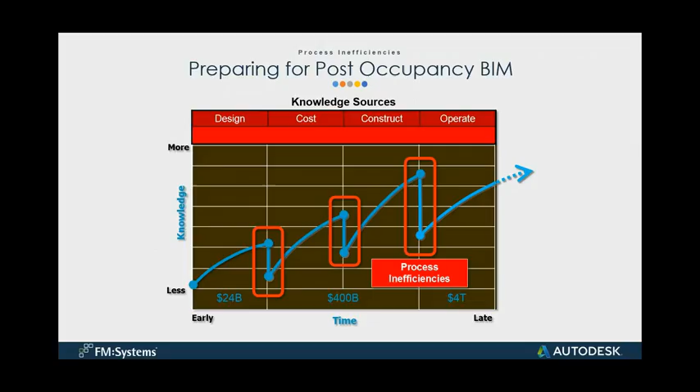So if you think about this from the perspective of design-build, design-assist, CM at risk—all of these contract models create processes with handover points. And it's those handover points where very natural inefficiencies crop up. If we have to move information from one stakeholder to the next via some form of lowest common denominator, invariably there are going to be information dropouts. These process inefficiencies are where the opportunity exists for building information modeling. And here's the reason why—this is, in one slide, why I say this is about process and not about technology: if we can understand and identify these process inefficiencies at the handover points, we can use building information modeling as a catalyst to process change.

It can become a platform upon which we can hopefully bridge some of these major handover points and create a much more efficient and smooth workflow.

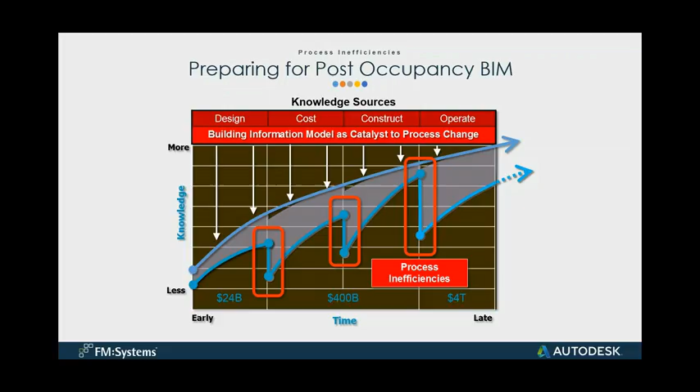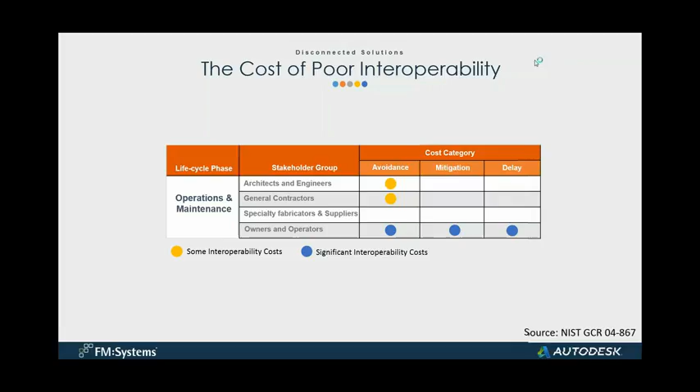It's really important to understand what these process inefficiencies cost and exactly how they affect everybody involved in the process. The National Institute of Standards and Technology, or NIST, did research which showed that the cost of that interoperability had a dollar value associated with it, and that owners really paid the most significant interoperability costs. They broke that down into a number of cost categories: avoidance, mitigation, and delay.

But what it really comes down to is the inefficiency inherent in the business process: redundant facilities management systems costs, meaning duplicate data entry into multiple systems; operations and maintenance staff productivity loss from rework, re-entering information, lost data, going back into construction process paper documentation; and simply idled employee costs, which assumes employees are waiting for information that's not readily available at their fingertips.

They actually estimated this to be 23 cents per square foot per year. So for a 100,000 square foot building, that's going to cost you $23,000 in simply interoperability costs related to technology.

We actually think it's a lot worse than 23 cents a square foot when you start to look at all of the processes, all of the technology involved in managing a large portfolio of buildings. Think about a facility manager's problem managing a large portfolio—multiple locations, different countries, regions, campuses—really multiplying that interoperability problem.

We've also got technology. They could be using AutoCAD to manage their floor plans, and they may be adopting a BIM-based process. They may be using different browsers across their locations, different databases, multiple different mobile platforms, et cetera.

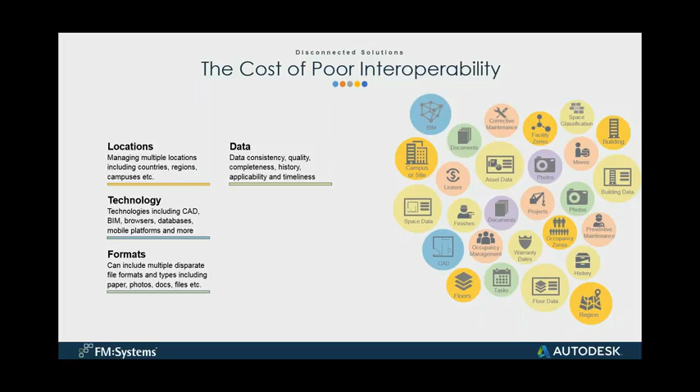Then there's the data consistency and quality. If you don't have standards, if information coming in off your construction or renovation and retrofit projects, or different locations, are all using different data standards, the quality is different, it's not complete, you don't have historical information—that's another area where interoperability occurs.

Then we've got accessibility problems. If we have some people who have secure access to information and then other people who don't, simply because they don't have the right technology or a username and password, they're suddenly disconnected from the process.

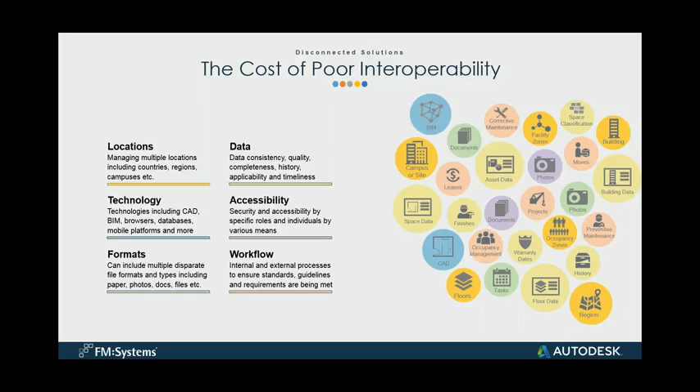And then last but not least, we've got workflows. We may have different workflow standards across one building, maybe all of our buildings, maybe different locations, et cetera. We really think that 23 cents cost per square foot is a very conservative estimate.

So I'm going to go ahead and pass it back over to you, Chuck, for a real case study here.

Trying to validate—if you think about clients with multi-million square feet portfolios and you start to multiply 23 cents a square foot, the first thing you want to ask is: is that number believable? Can we really believe that? So we did a very simple straw man survey with a consultant who was working at Sandia National Labs at the time, and we took a look at whether that 23 cents a square foot is believable.

In this straw man survey, we focused on the maintenance organization and the amount of time they spent looking up, recreating, or somehow finding information that was in somebody else's head somewhere in the process and got lost by whatever means. Maybe it's the 3-inch 3-ring binder they can't find. Maybe it's the drawings they can't find. Maybe it's information that didn't get transferred into their CMMS system. Maybe it's: I get frustrated, I jump in my Cushman cart, I run across campus, and I come back.

At Sandia's campus that added up to 40 cents per square foot—the amount of time their maintenance people spent recreating information just to go do a work order.

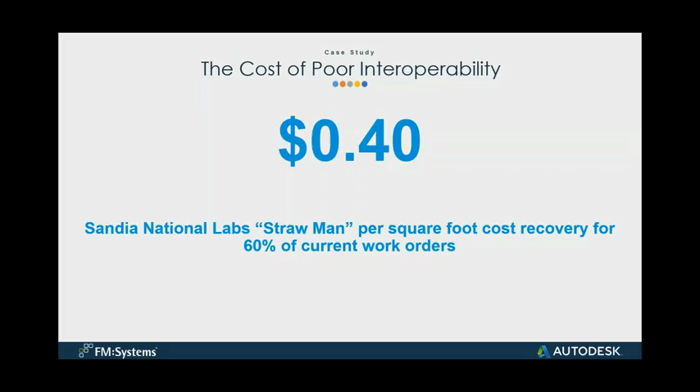And that was when we thought to ourselves, okay, there's opportunity here. And the opportunity here is best summed by Barbara when we go back to her book again, and she says that BIM is the perfect complement to collaborative teams, especially those that are willing to care about the fluidity of information sharing and coordination rather than the sanctity of the drawings. And as a non-practicing architect myself, when an AIA fellow tells you that it's not about the drawings, you should probably listen. I thought that was tremendously revealing when she talks about the idea that BIM is a complement to collaborative teams.

So that leads us very naturally into the next question: how do we create a collaborative environment across all of these stakeholders, including your own internal stakeholders as an owner's organization and all of the silos that you have internally? I think the methodology for building that collaborative framework boils down to 3 questions, and when I work with owners, I ask them to continuously iterate through these 3 questions.

The first question is, who's going to use the data? Until you try to understand who's going to use the data, you're solving an undefined problem. Once you understand that, you can move on to the next question: what data am I going to need and how am I going to get it? Now we're starting to define the solution. Last but not least, we have to maintain the integrity of the solution by asking how will it all be maintained? Because if we can't answer the 3rd question, we should probably go back to the first question and start over again. I want to drill down a little more deeply into each of these 3 questions.

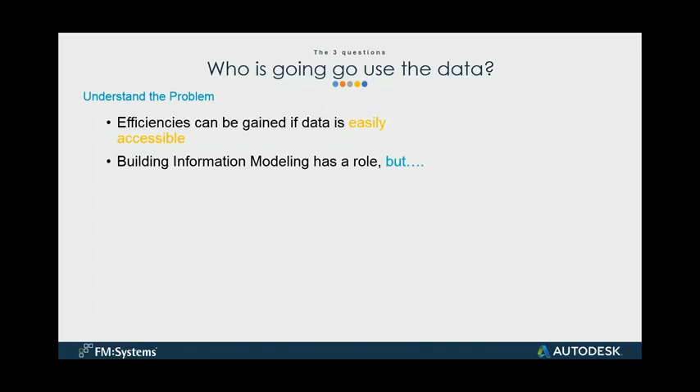The Sandia Strawman survey showed that. The amount of time they spend recreating data, that's something we need to work on. We know the building information model has a role. I talked about that idea of the building information model being a consistent data conduit, but in order to do any form of post-occupancy BIM integration, you have to stop and understand the people who are ultimately going to consume that data, what they do, why they need the data, and how they use the data.

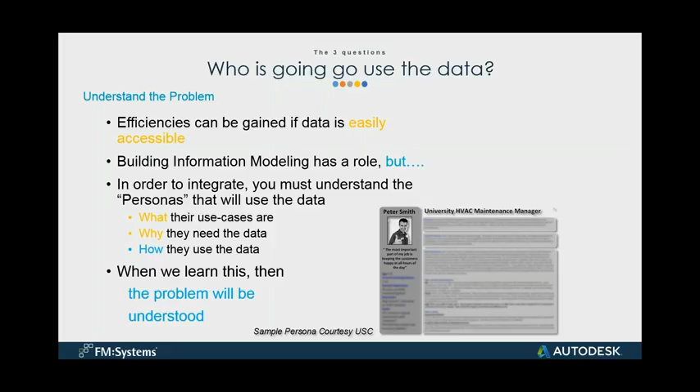Only when we truly spend the time to learn this can we understand the problem. This is where I've seen most owners' organizations struggle. We start immediately talking about technology: I need this system to talk to that system and this system to talk to that system. And you stop and ask the question, why? Who's going to use that data? And when you understand who's going to use that data, then you very naturally progress into the next question.

Now that we know who's going to use the data, what data are we going to collect and how are we going to get it? Who's going to use the data defines the problem; what data you're going to collect and how defines the solution. Because if you truly understand that person, then you can start to understand what data we're going to collect.

One important thing as owners that I think you need to do is transition your thinking from as-built to as-maintained. Those are 2 very different thought processes, let me define what I mean. Typically now, you receive as-built documentation from your A&Es and constructors who are doing the work. That as-built documentation is designed to document the condition or state of the facility at some point in time. I'd love to say when they turned it over to you, but we all know it's not true.

And the challenge with as-built information is that in the building information modeling world, the as-built information is going to be that constructor's fabrication model with all the embeds and hangers and all of the things that they need to construct that facility. You probably don't need that. In fact, in most cases, you don't need that much level of information to maintain a facility.

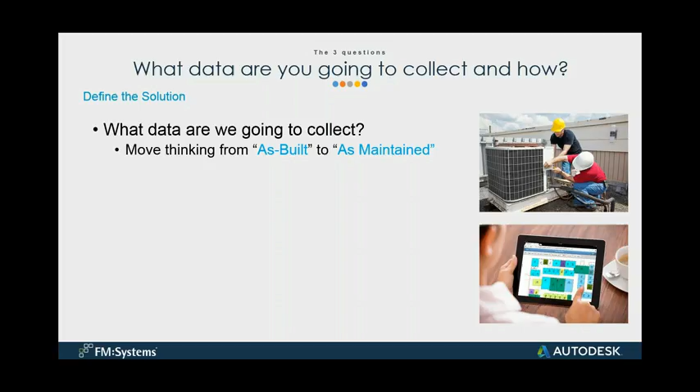So you shift this idea to what do we need to maintain a facility? Because when you do that and apply the fact that we've taken the time to understand our end users, we can start to target specific data. If it's asset data, is it make, model, serial number? What are we trying to capture? For space data, is it room attributes, finish attributes? What is the information? What are the other use cases and personas that are going to happen?

Because when you do this and apply the idea of what data we're going to collect to who's going to use the data, the biggest thing that happens is the amount of data you're going to use typically decreases, because you're no longer boiling the ocean. You're not trying to solve everybody's problem. You've focused and with great intent pursued your solution, and that typically reduces the amount of data you're going to capture.

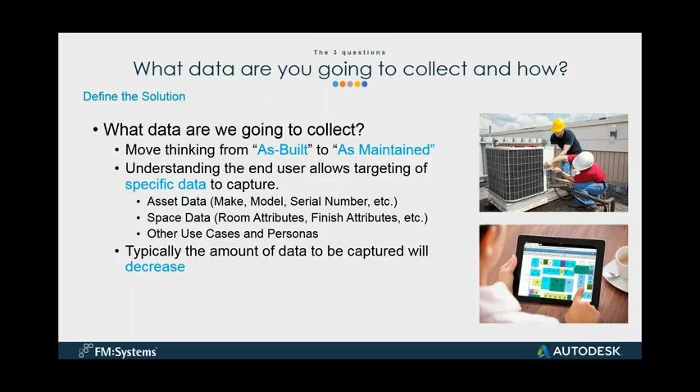And again, the process is fairly complex. Brian, why don't you talk about some of that process complexity?

Absolutely, Chuck. So one of the things I really like to hammer home is that a huge part of the success of this process, and as Chuck was saying, it is a process, is really understanding that the majority of the people adding information into the model may not even know that a model exists. They're not BIM technicians, they're not CAD technicians, they're not people who are going to have a sophisticated handle on the 3D attribution of the model, but they're involved in the process, and for this to be successful, it's best to start very early in the AECO process.

So starting right here, we're talking about the design and engineering team providing some fairly rudimentary, probably not entirely accurate information very early on - asset IDs, some descriptions of the space and the equipment that's going to be going into the building based upon the design and engineering process, some performance data, the location of where that equipment or perhaps space is going to be.

It then gets supplemented by the general contractors and subs, if they've been given an opportunity to do things such as add the manufacturer, the model, the install date, the warranty information. This is the actual conditions once that piece of equipment is installed in the facility.

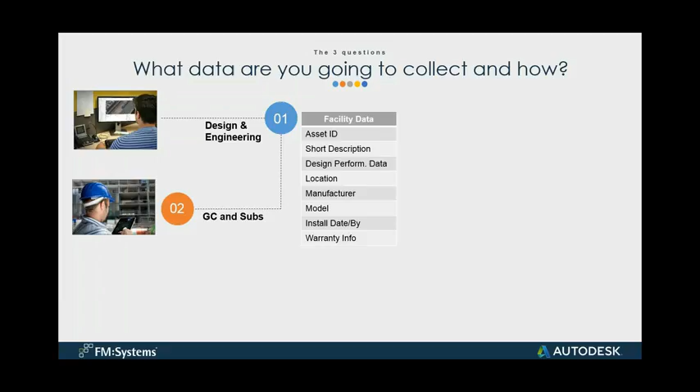Passing that on to the commissioning process, once the building owner begins to get involved, they may do things such as add an asset tag number, which could ultimately make it very easy for a technician or someone within the facility to walk up with a mobile device, scan a barcode or a QR code in a door jamb or maybe on a piece of equipment, and bring up information about that room.

We really truly believe that all of these people are actively providing input to the model and maintaining it over its life cycle. And if it's done in a proper way with standards and quality, then that model is going to be much more ready for design and engineering once that first retrofit or renovation occurs. Maybe there's going to be an addition to a facility. If the model's been maintained accurately to a specific data standard that the owner has deemed necessary throughout its operations, you're going to be a lot more successful.

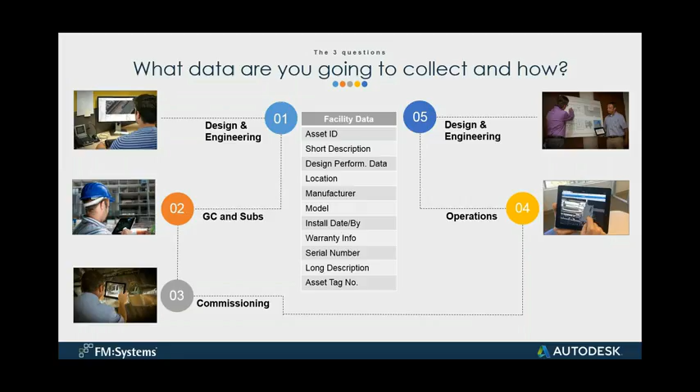So we really believe that BIM, as Chuck was saying, is not really about just a Revit model, for instance. It's really about the process that's taken into account when doing the maintenance of that as-maintained or operational Revit model. And that is the transition, Brian, to the as-maintained model, right?

So here's the second half of that question. We've talked a lot about what data you're going to collect. Let's talk now about how you are going to capture that data. Because as Brian mentioned, in a typical scenario, the data might be available from multiple stakeholders at different times in the process. So you have to start thinking about what is the process I'm going to create that captures that information when it's available, at the right time, by the right stakeholder, and who can best capture that data. Again, if we've captured the data, then how do we bring all of that data together?

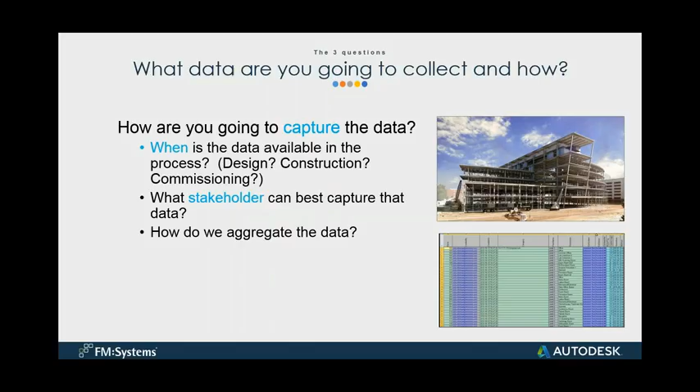Are we going to take advantage of a workflow such as COBie, or other workflows that allow us to aggregate and bring all of that data together? From an Autodesk perspective, enter the cloud. We've been working with FM Systems on a workflow that integrates with our BIM 360 platform, allowing you to take advantage of the cloud and push those initial design intent models out to the cloud.

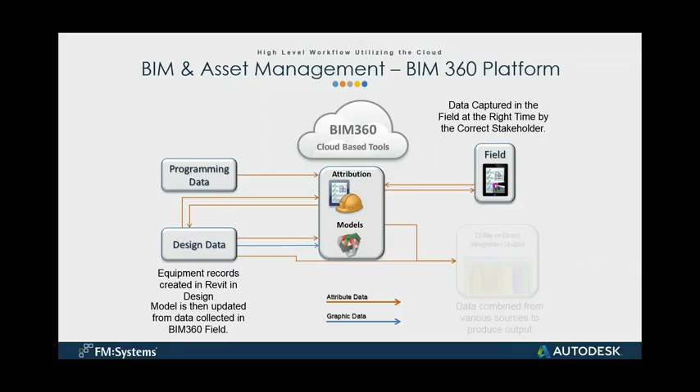So each stakeholder, at the right time when that piece of information is available, can capture that using a mobile device. Once we've captured that data, we can use it to update all of that field-collected data back into the model for all the attributes we didn't have available at the time, and then all that data can be packaged both graphically and attribution-wise and moved downstream.

So that talks about how we move that data downstream and what the benefit is for us. We've talked about the idea that once data is captured, there's multiple options for moving it downstream - simple imports and exports, rich data transfers through COBie - but the key to the discussion today is the FM Systems FM Interact bidirectional integration with the Revit platform that allows that information to be exchanged bidirectionally.

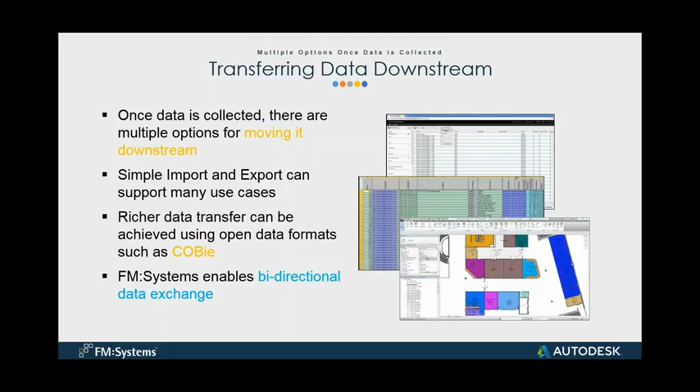So once the model has been informed through that cloud-based process we described, it will move automatically downstream, populating assets, populating space information, etc., into the FM Interact platform. And that bidirectional exchange of data becomes incredibly important when it comes to answering the third question, which is: how will the data be maintained?

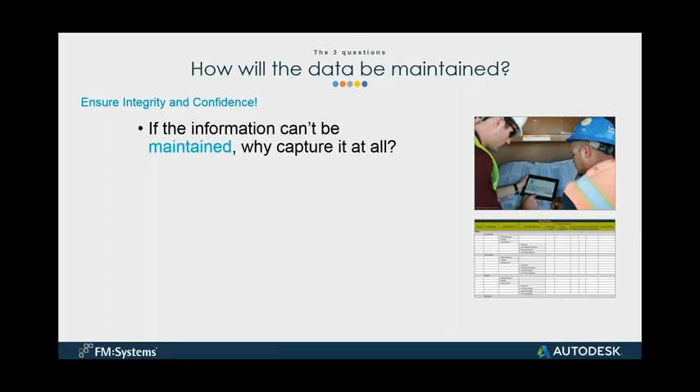I think this is the question where most people trip up. They can do an initial import, an initial populate, but they don't have a process in place to maintain that data and keep it current. And if you don't have a process in place, how do you ensure integrity and confidence in your data set? Because the first time somebody opens that data set up and the information they see isn't current, they lose confidence in it. And that begs the question - if it can't be maintained, why capture it at all? That non-current data risks the perceived integrity of the entire system.

And here's the biggest piece of advice I can give you: it's not about the model. It's really not about the model. It's about understanding the separation of the graphical data from the attribution. And ask yourself the question - in many cases, does the model even need to be updated?

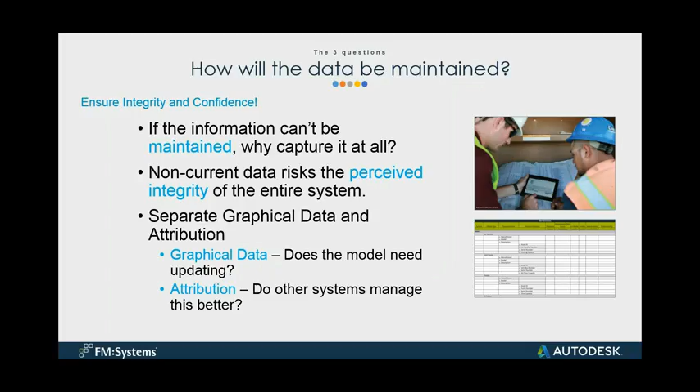If I replace a pump, do I need to go back into the Revit model and update that? Graphically, it's still a pump, still in the right location. It's probably a more efficient process to take advantage of that FM Interact bidirectional integration to swap that asset out in the FM Interact asset model and let that integration reinform the model as to the state of that data. That is how you maintain integrity in this entire system, and that's why we're here to talk to you about today.

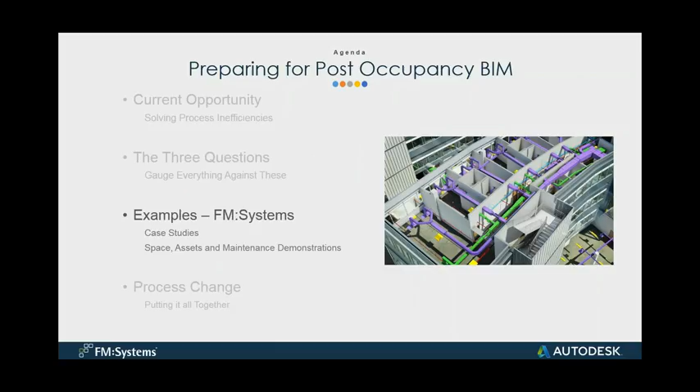And Brian, that's a very natural transition for you to talk specifically about some of your case studies and the FM Interact platform in particular. That's right, Chuck, and thanks.

So what I'm going to do is talk about post-occupancy BIM, really focusing on an FM Systems specific solution, FM Interact. Before I begin this discussion, I like to level set how we talk about lifecycle BIM versus how maybe an AEC team might talk about lifecycle BIM, because we come at it from a very facilities management centric direction.

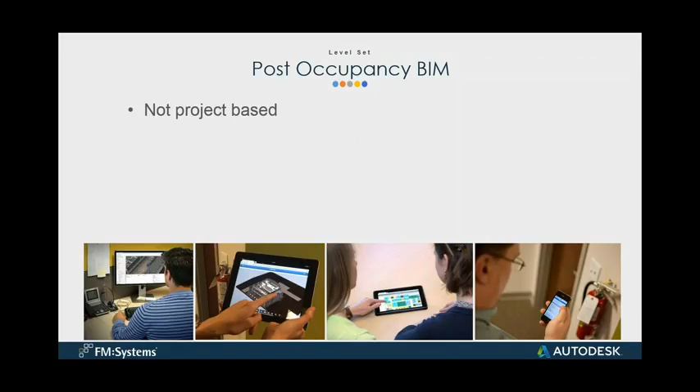So we tend to think of post-occupancy BIM as not being project-based, it's portfolio-based. Most of our customers have very large portfolios of large, complex buildings. They've got projects going on all the time. They need those models to come in a way that fits within their portfolio, that have information classifying space and assets in ways that make sense to them. So we really like to think of this as a portfolio-based approach to managing building information models after occupancy begins.

We also strongly focus on building elements that need to be maintained. These are the things that the maintenance team will have to keep updated and operating properly in a safe manner on a day-to-day basis.

This is the preventive maintenance scheduling. These are the things that need corrective maintenance done to them by facility teams. We also tend to focus on the things that are important in the model as being the elements that need to be inventoried. The furniture, you need to get an accurate furniture count. You want to know how much carpet you have on your floor. You want to know what the life cycle cost of replacing the wall finishes is going to be. Those types of things that need to be inventoried, we also place a heavy emphasis on having those inside of the model.

The last two things that need to be pragmatic and easily maintainable. Most of the people participating in this process are not Revit technicians. They're not BIM technicians. They may not even be that technically savvy, but what they are is subject matter expertise in their specific area of facilities management.

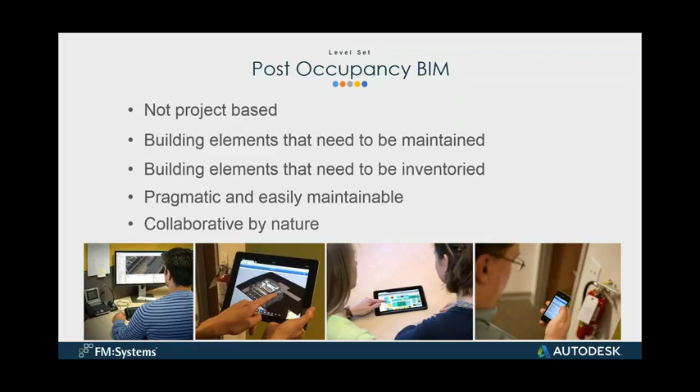And we truly believe that this is collaborative by nature. So people who are providing information, maybe we've got that maintenance technician over there on the right with a mobile device who's doing a preventive maintenance task on a fire extinguisher. We may have somebody in asset management who needs to order fire extinguishers. We may have somebody who needs to actually place those in the drawings. We may need to look at things such as emergency exit planning. We need to look at space management, et cetera. So that essentially makes it collaborative by nature.

So we believe that all of the BIM lifecycle participants are anybody within a facilities organization who may need to touch that data that's housed in a model or multiple models in a system like FM Interact. That could be people like space planners, move managers, even lease administrators, human resources people. How often do we think of human resources as being involved in a BIM-based process?

Well, those are the people who have all of the information on the employees who occupy our space. They know where those people sit. We can connect to that information and provide it up in the model. We really believe that BIM lifecycle participation is really a collaborative process and really highlights the value of being able to use a cloud-based product like FM Interact to provide appropriate access to all those participants.

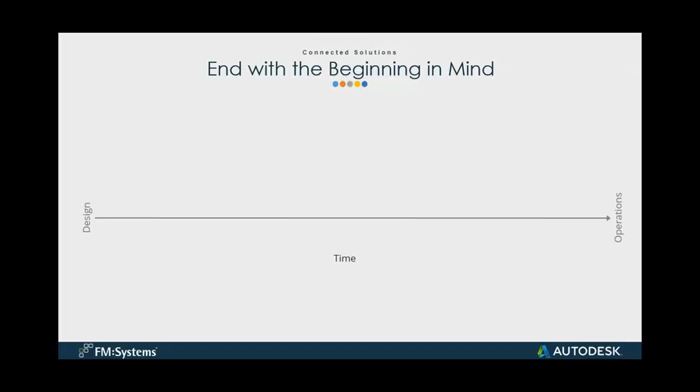Traditionally what we've gotten in the past in terms of our customers who have been bringing models to us - our first Revit integration was back around 2009, 2010. We started getting models from customers. They were often maybe fabrication level models, they were construction models, they were used for sequencing, maybe clash detection, and they really weren't the right model.

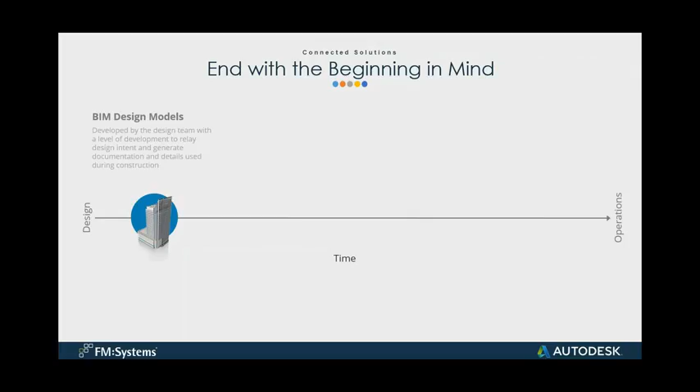So what we've decided is that over time, several models are created during the AEC and into operations process. We've got the design team models, then we've got our construction models that are used for things such as clash detection, coordination, and maybe quantity takeoff. We've got our BIM as-built model, which is a great record with fabrication level detail potentially. It's sort of that record of what happened in the building, but it's not easy to maintain during operations.

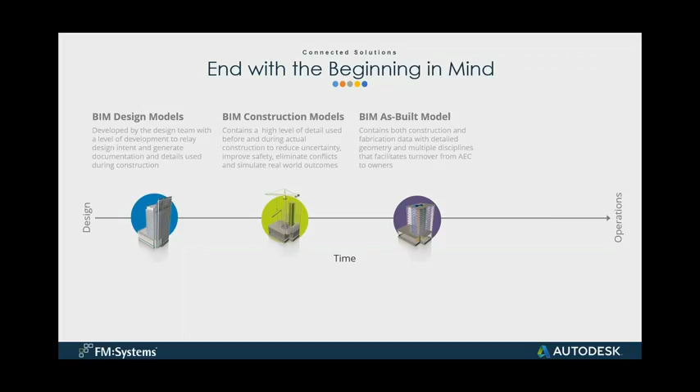So if you could take the best of all of these models, we recommend that building owners adopt something such as an as-maintained model, what we call the BIM FM model, which is really derived from the as-built model. We remove a lot of the extraneous details and sheets. We really lighten up the model quite a bit. We don't focus on things like structure, which is not maintained on a daily basis. And we really look at those items within the model, primarily the MEP components, the spaces, the walls, et cetera, that really make up those things that are important from a day-to-day operational standpoint.

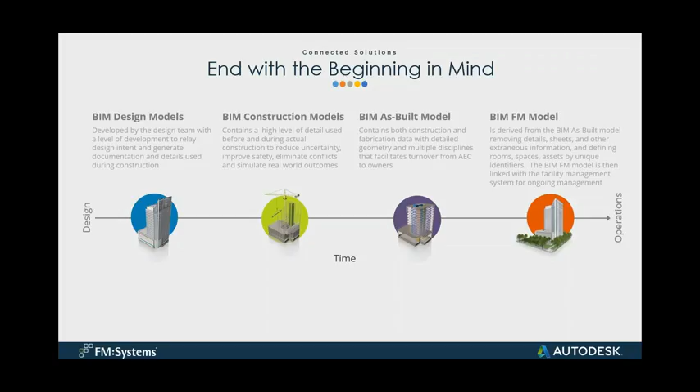So, Chuck, I'm going to pass this back to you for the value of space management. Yeah, let's talk about that.

The value of a building information model in space management focuses on the idea that BIM inherently understands space boundaries. When you draw four walls that enclose a room, the model knows that's a room, and essentially you eliminate the polylining process.

And I think we all know how painful polylining can be. I heard a quote once that I've always remembered: polylining is what bad architects have to do in hell for all eternity. As someone who's polylined a few million square feet in my life, I agree with that statement very much.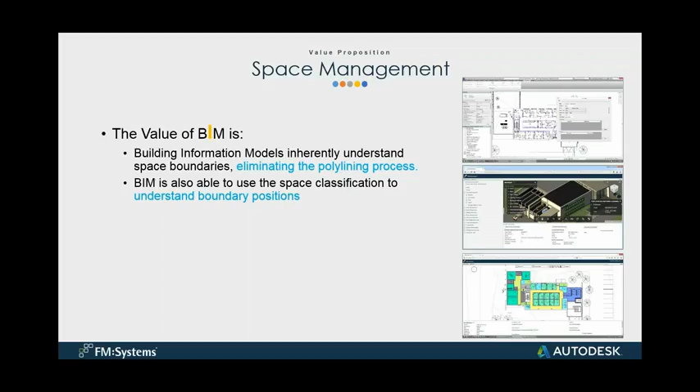But then you start to think about the intelligence in the building information model—those space classifications can understand boundary positions. Based on how we're classifying the space, the boundary object may go to the inside face of the wall, or to the centerline of the wall, because the building information model understands that.

It also understands the effects of penetrations on space calculation. What I mean is, if we're using BOMA standards and the window exceeds 50% of the vertical height of the wall, we get to go to the face of the glass. If not, we need to go to the windowsill.

How do you know that in an AutoCAD drawing? You don't know how high that wall is, so you make some assumptions. And in many cases, we've talked to a lot of organizations who've made some wrong assumptions.

It's also about the idea that space can be easily scheduled and quantified inside that model. Most importantly, with the bidirectional connection to FM Interact, it extends the value of the Revit spaces to the entire FM team. We can take that model coming out of the process and move it downstream.

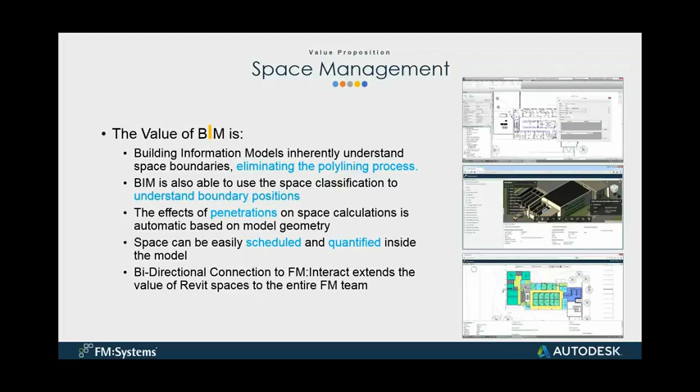Brian's going to talk to you about a very interesting and appropriate case study that happened with Xavier University. Yeah, we've got a couple of really good case studies here—customers we've got terrific relationships with.

Xavier's facilities management team, Greg Meyer, admitted he sort of stumbled into what he called accidental BIM. One day he walked into a project room where they were doing a construction coordination meeting for a new fourth building campus addition, and he saw the Revit models up on the wall. He realized the tremendous amount of information already being put into those models from the project team that could be used downstream for facilities management.

So they got FM involved in that process, making sure the models coming out of design and construction actually took facilities management into consideration. This allowed them to save thousands of hours of data entry.

Greg was able to bring these models online very quickly and have all the space information automatically synchronized into FM Interact, saving hundreds of hours of having to walk those spaces and manually enter all that information. Using a traditional CAD-based process, you'd have to polyline AutoCAD drawings—you'd have to strip out all the intelligence in a Revit model and essentially redo it.

It's one of those interoperability issues we were talking about earlier. They were able to take Revit plus FM Interact and save thousands of hours of data entry, getting their brand new facilities up and running very quickly.

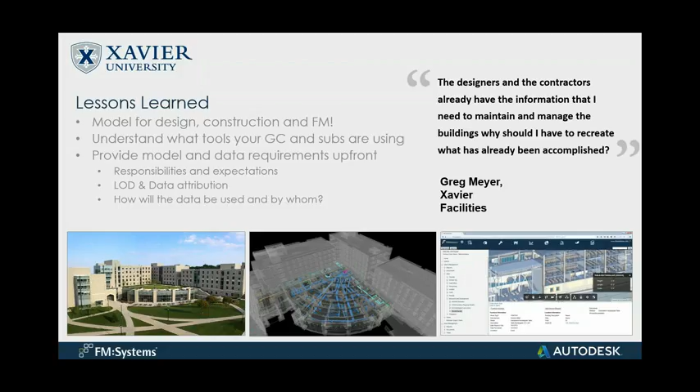All right Chuck, I'm going to go ahead and hand it back over to you for the asset management discussion now.

Chuck, are you muted, Chuck? All right, I'll go ahead. I think Chuck's... I actually was, Brian. Sorry about that. There you go. It's okay. I should be back now, right? Yeah, you are. Sorry about that. Okay, yeah, I don't know what happened. Voice over IP went out on me for a little bit.

So Brian, the quote you had on that last slide was so totally appropriate, right? The designers and contractors already have the information that I want, why should I have to recreate it? And I think in one sentence from Greg Meyer, that's exactly what you should be focused on.

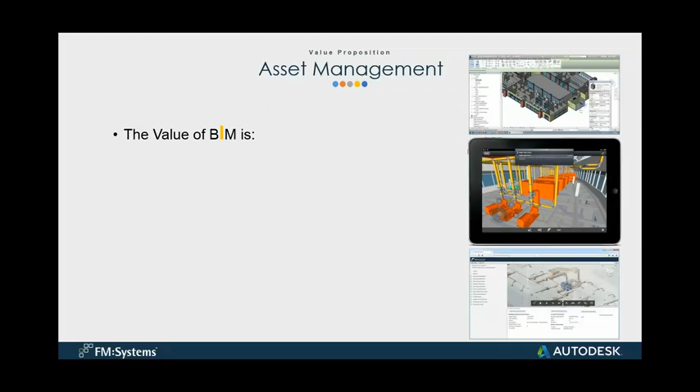And that applies to assets. So if you think about the value of building information modeling as it applies to assets, it's really about assisting in that field collection of data about all of those assets. Think about that workflow we talked about earlier in the three questions, and how each stakeholder captures a bit of information at a time it's available. It's also about capturing that information and taking advantage of the bidirectional integration with FM Interact to move that data downstream and dramatically reduce the amount of time you spend populating those databases.

But then you can start to extend that value proposition when you start to think about visualization. Can I get the maintenance person to the right piece of equipment the first time and actually understand where he's at, where he's going, and what he's going to have to do? Because if that piece of equipment has to be above a ceiling, how high is it above the ceiling? Does my organization have a requirement that above a certain height I have to use a lift versus a ladder? If that's the case, then it's going to really change his workflow process.

And that helps understand some of those regulatory concerns. In the world of healthcare, not having all of that data captured while the air handler was powered up before it was turned over can affect the compliance with your first JCAHO post-occupancy inspection, right? So can we integrate all of these systems together so we can capture that information and move it seamlessly downstream, help visualize, and eliminate that painful process of populating a CMMS system? And Brian, I think you're going to talk about your MathWorks case study as an example of that.

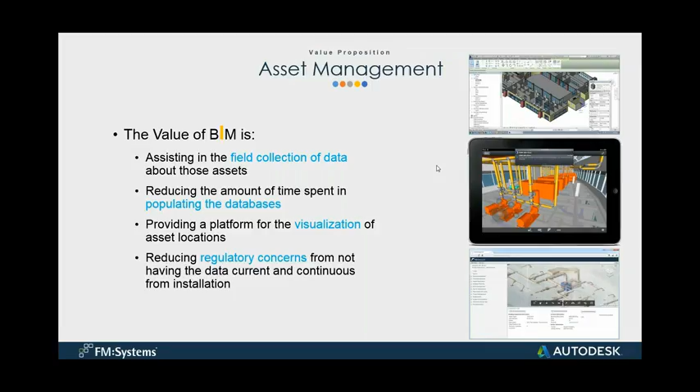That's correct. All right, let me go ahead to the next slide. So another really great example: MathWorks is an example of a customer. They actually did have BIM or Revit savvy technicians on their facilities management staff. We don't see this very often, although we see it changing.

We see many, many more facility managers coming to regional conferences like Midwest University or BIM workshops. We also see them showing up at much larger conferences like Autodesk University. So people who are in operations are starting to get Revit savvy. We're really excited about that. MathWorks actually had an opportunity because they had technicians on staff. They knew they wanted to move to a BIM-based process for managing their facilities.

They did this by taking advantage of the work that was being done on a highly technical building that was being built at their Apple Hill campus, an exciting new facility. With Revit and FM Interact, MathWorks was able to leverage an immense amount of high quality space and asset data that was in their model.

Now, to their credit, they came back to me and said, you know what, maybe we actually got a little overzealous, we probably put too much information into our Revit family. So one of the lessons learned was really focusing on the information that you can maintain on a daily basis with your current existing facility staff and the workflow processes that they currently use. You don't want to be disruptive in a way that's going to have a negative impact on the way your facilities are operating.

So some of the lessons learned was room numbers matter. I really love to go back to this because before I got into software many years ago, I was a space planner and management analyst at the University of Arizona. I once remember we had a large aerospace facility built, and we got the drawings - the architect had numbered all of the spaces on a grid layout, which had nothing to do with the reality of how those rooms were ultimately going to be numbered. This made it really difficult - one, we had to renumber everything, and two, track where things actually were going to be in accordance with the schedules that had been produced. So MathWorks learned that room numbers matter.

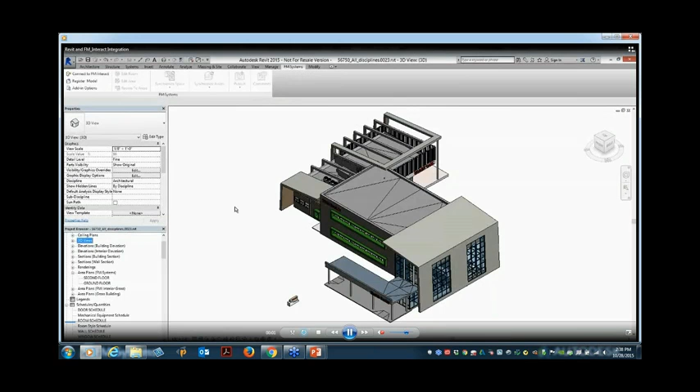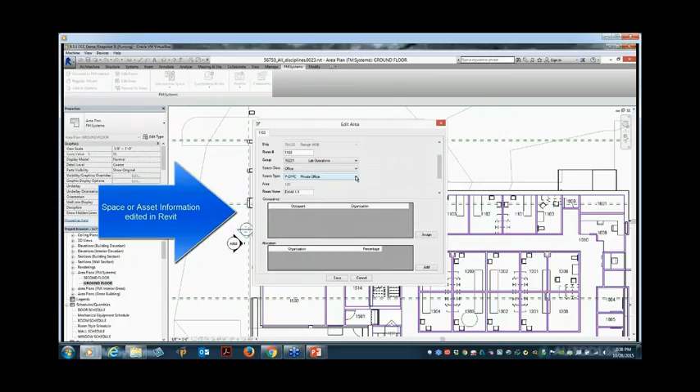So let me just go ahead and jump into the bi-directional Revit integration. Right now I'm starting in Revit. I'm just going to simply go into the ground floor floor plan. You'll notice that we've got a plug-in toolbar that goes into Revit that allows me to bi-directionally connect, via secure username and password and a web service, this model to an underlying FM Interact database. I'm going to go into this area on this floor plan, and I've been given permission, privileges as a Revit user to modify this information. All of the data that you're seeing in these drop-downs, such as the space type, space classification - that's all actually coming from FM Interact, from our relational database that's running behind the scenes here. I'm going to make a couple of changes, and I'm going to save.

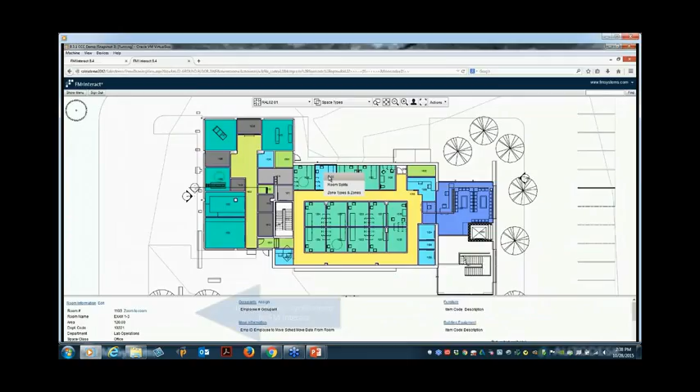Next thing I'm going to do is actually pop out into FM Interact. This is that exact same drawing - it's bi-directionally connected at the data level to that model. What I'm going to do is edit the information now in FM Interact. I may be a space planner, facility team member that's been given permission to change this. I'm going to change the space type on this back to a private office from an exam room, and I'm going to hit save, and you'll notice that the color automatically updated based upon that process. Now I'm going to go right back into Revit, and I'm going to see that, yep, that data actually changed.

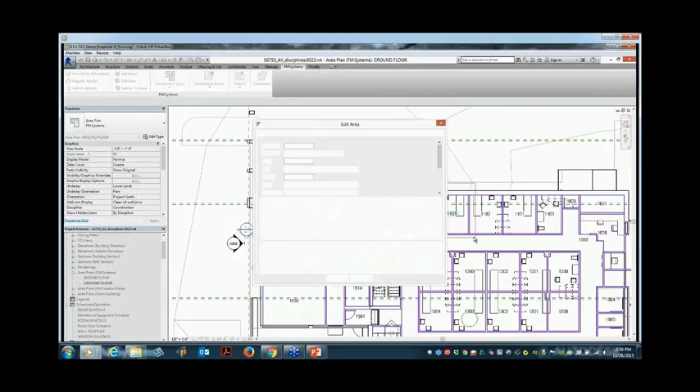So this is not an import-export. This is a highly secure web service that allows you to bi-directionally pass data back and forth between Revit and FM Interact. The next thing I want to show is our support for the Autodesk A360 large model viewer.

This is that exact same model that's been uploaded into FM Interact, the one you were just looking at in Revit. We've got really nice controls to stream this large model directly to the browser quickly and smoothly, and this allows me to zoom in on this model.

I'm going to select a piece of equipment on the roof, and I want to pause here for a second because I want you to see this. All of this data down here is actually coming from the FM Interact database. It's connected to that object, linked bidirectionally between the model and our FM Interact database.

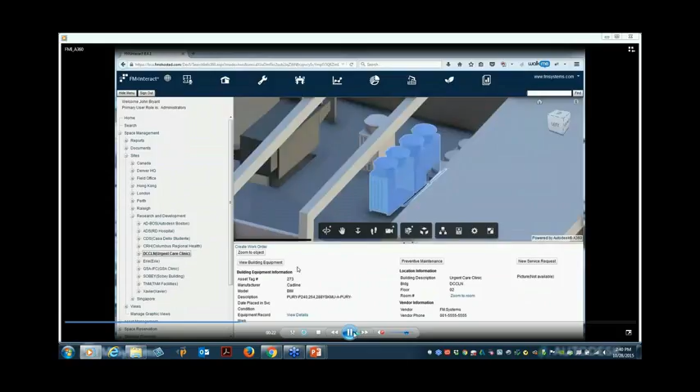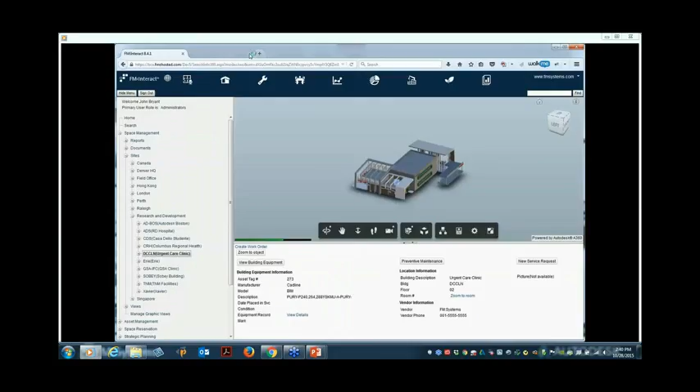Now I'm going to show you that not only does FM Interact track that data, but we track an immense amount of detail about a building asset, far beyond just the attribution. We look at things such as work orders exercised against that piece of equipment, archived work orders, equipment details, where it's located, when it was placed in service, when its warranty is due, PM schedules, documents and images, even a BAS log for a building automation system. If you've got that connected through our FM Interact integration component, you can ultimately see all of that data if it's available.

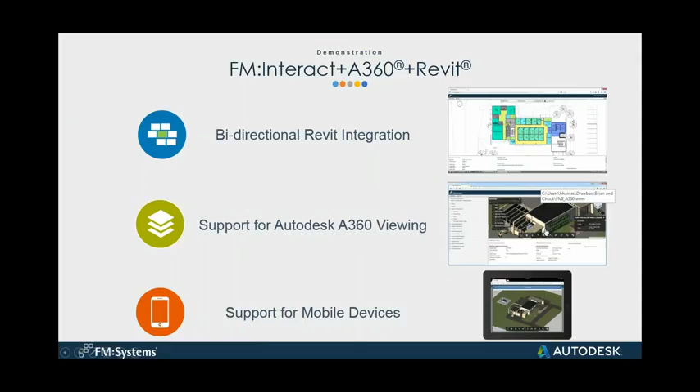Now, the last one I wanted to show: we've really made a huge push into mobile enabling all of our offerings over the last couple of years. We've got support for mobile devices. The next thing I'm going to show you is a product called FM Mobile, which extends FM Interact to mobile devices such as iPads, Androids, iPhones, etc.

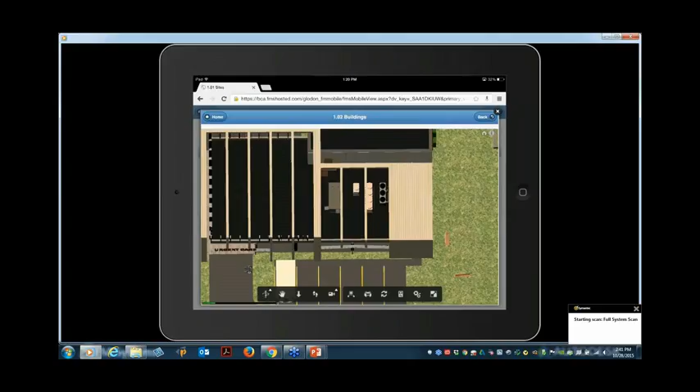Same exact capability. This is the Autodesk Large Model Viewer running within my iPad, and I'm able to access that exact same piece of equipment and bring up the attribution. Once again, all of this data is coming directly from the Revit model and flowing into the FM Interact database.

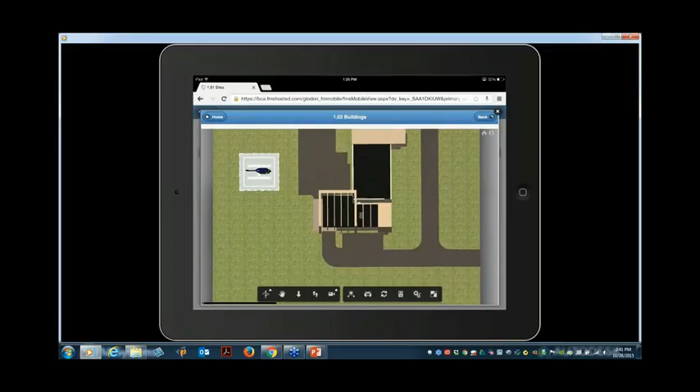This really makes it easy for technicians to potentially access that model out in the field, click on a component, find it easily, interact with a task that's been assigned to them for corrective or preventive maintenance, take photos and attach them to the data. All of that we consider being part of the building lifecycle and part of the BIM-based process.

So Chuck, I'm going to go ahead and pass it right back to you to wrap things up.

Yeah, so let's talk about how we put this all together. There are certain components we've seen owners successfully use to start creating a process around doing all this. The first one: if we think about the three questions, starting with who's going to use the data, you really have to look at this end user understanding.

Do you need to go as formal as developing a persona like the one we saw on the slide? Not necessarily, but you do have to take time to go out and learn about those stakeholders. And notice I said go out. I've been involved in multiple of these discussions with owners, and I can tell you I've had limited success when we brought maintenance or operations people into a conference room and talked to them. When we went out and spent time with them and saw what they did, we got a significantly higher amount of understanding for what they do.

We think about the second question: what data are you going to collect and how? You need to start influencing that, or if you don't already have them, develop your BIM project execution plans, your model development specifications, your model data QA/QC tools, and then think about that data collection transfer format, or whether you have the ability to take advantage of a bidirectional interchange like the FM Interact platform.

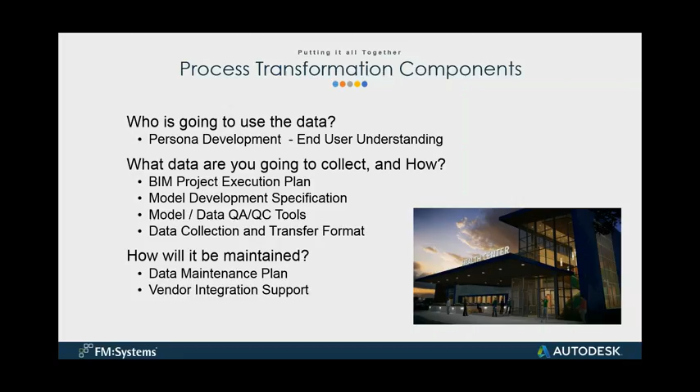So the good news is, to put together this style of documentation, you don't have to start from scratch. There's a lot of things that are already out there in industry that you can take advantage of.

So the first one is, from a contractual standpoint, level of development standpoint, you can look to the AIA or the AGC BIMForum. From a data transfer or data standard format, you can look at COBie, you can look at the National BIM Standard.

But when you start to think about how do we put together this from a process standpoint, if you have no guidelines in place, look to some of the stuff that's out there in industry right now. A good example would be the Penn State guidelines and their ability to help you understand, develop a strategy, develop an execution plan, and then most importantly, how's it going to affect your contracts.

You can also then look at the project planning and execution guide for an individual project. And as Brian mentioned, FM Systems has now released a BIM FM guide, which I've had the pleasure of participating in and reviewing, and I think it's a great document for getting started.

Let's break it down into some things that we really want you to walk away with in this discussion. First of all, unequivocally, this is a process discussion. We'll overlay technology on it, but we really have to start by having a discussion around process.